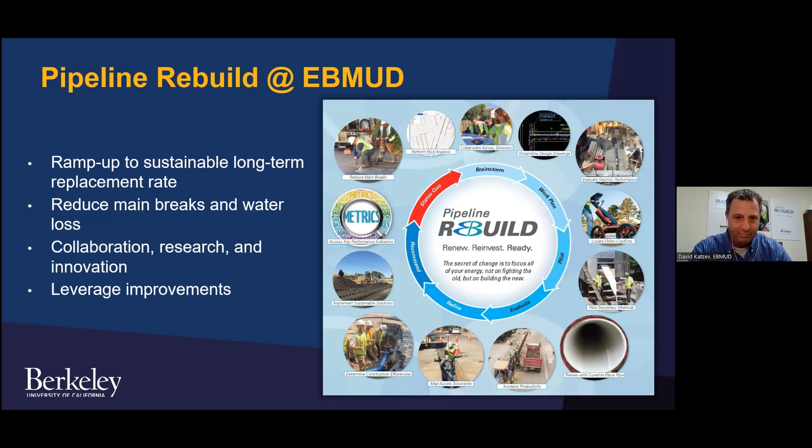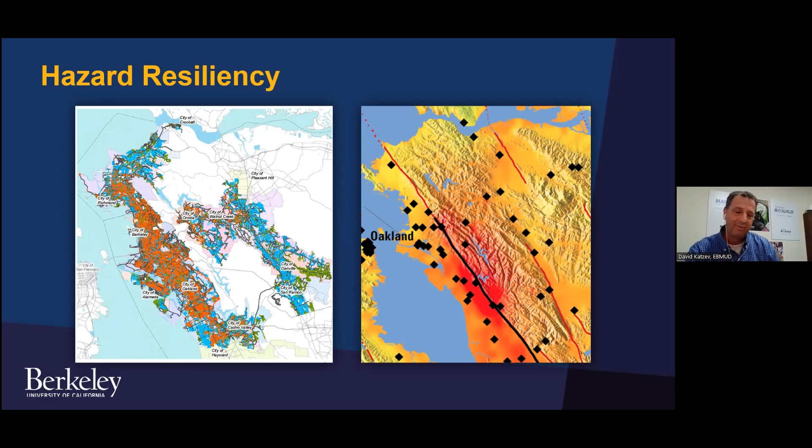In terms of what we need to put in the ground, we want it to last. Of course we want it to last a long time, but we want to make sure it's going to be resilient. So that's led us to universities.

But a few years ago an opportunity came up where the professor at Cornell retired. The professor, Tom O'Rourke, has a very good relationship with Kenichi Soga. We decided to move the whole testing apparatus over to UC Berkeley.

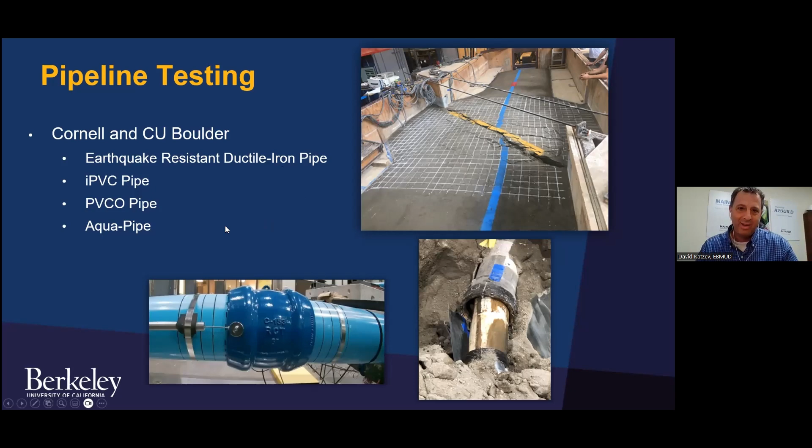And that's part of what started the whole Center for Smart Infrastructure. So now, instead of flying across the country to Cornell to see the tests - and by the way, CU Boulder has some testing too - I can just walk out the door, get in the car, and drive about 15 minutes up to the CSI, the Center for Smart Infrastructure, and see the test right then and there, along with my other colleagues here at EBMUD. So it's really convenient for us, but it makes sense - we're right here on the Hayward Fault, and we have these testing apparatuses right here in our service area. That's a little bit of background on how we've gotten to here.

And with that, I'll pass it back to Kenichi to talk a little bit more about what is the CSI. And like Kenichi said, we'll kind of go back and forth.

So the collaboration is really using a holistic approach to develop resilient systems through state-of-the-art lab work, which you sort of saw, and we'll give you more examples - smart sensors and robotics. How do we bring this new technology into the market? Looking at a lot of data - there'll be a lot of data coming from sensors, but we'll also already have lots of data. So how can we do that?

At the same time, how does pipeline-level instrumentation affect the whole system-level thinking of looking after our infrastructure? Obviously the challenge is aging infrastructure, climate change, water supply, natural resources, emergency and community preparedness. So even though we start with pipeline testing, we're growing our activities together to look at these challenges.

And the spirit is to provide innovative solutions to realize adaptive systems with the intelligence of life. Why is it adaptive? Because we tend to design our infrastructure for 100 years. David would like to prolong the life of the infrastructure to 150 or 200 years, because some systems are working well, but then he wants to know when to replace and when not to replace.

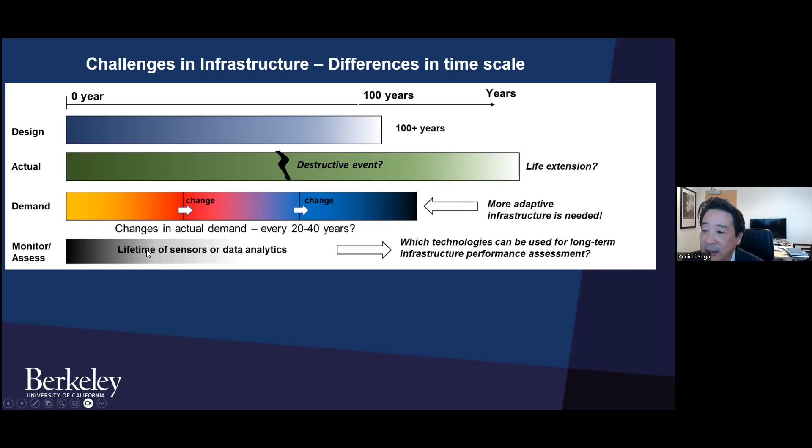Obviously we know the reason we say aging infrastructure is because demand changes every 20 to 40 years. It's not just that the pipeline is degrading, the way we use it is changing, and that creates issues for aging infrastructure. So rather than fixed design, can we make our infrastructure more adaptive to changes? And if you want to do adaptive change, you have to understand the real, actual performance, and that's where sensors come in. But then the question is what kind of sensors are good to monitor use for many, many years, for 20 years to come?

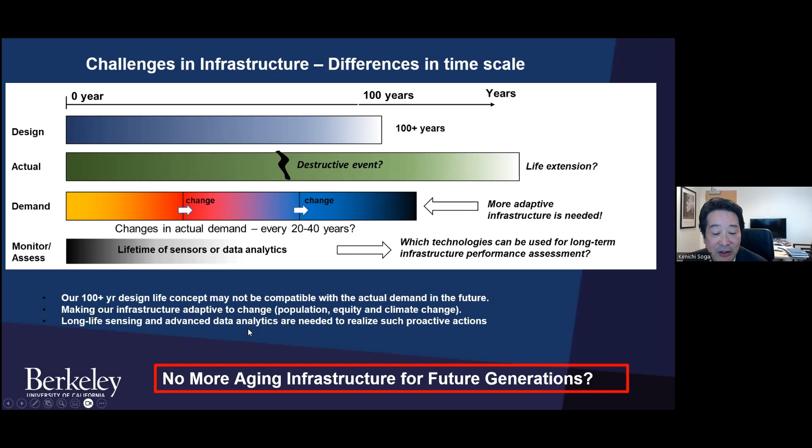We want to make our aging infrastructure not be aging infrastructure. It'll be great to say to our next generation, there'll be no more aging infrastructure.

This is something that David likes to talk about. Do you want to talk about this?

So there's a variety of areas where EBMUD has challenges, and we can link up with UC Berkeley to do research and come up with solutions that we can then implement. This shows the overall workflow and where we can all fit in with the different challenges that we have.

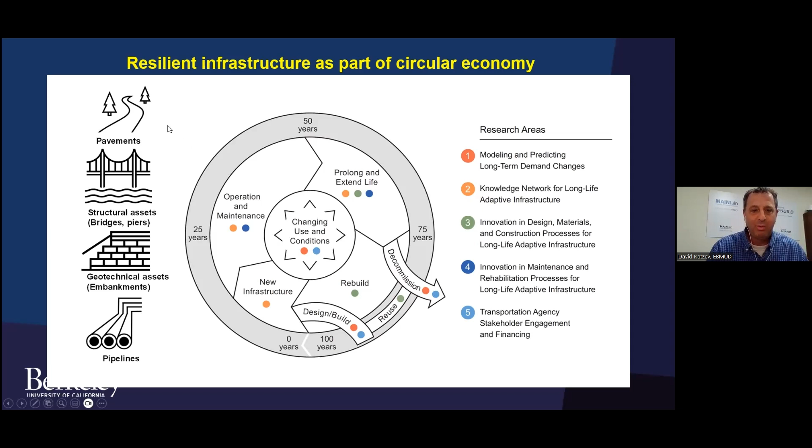Can we think of infrastructure as part of the circular economy? How we reuse the material and that sort of thing is something we're all thinking about right now.

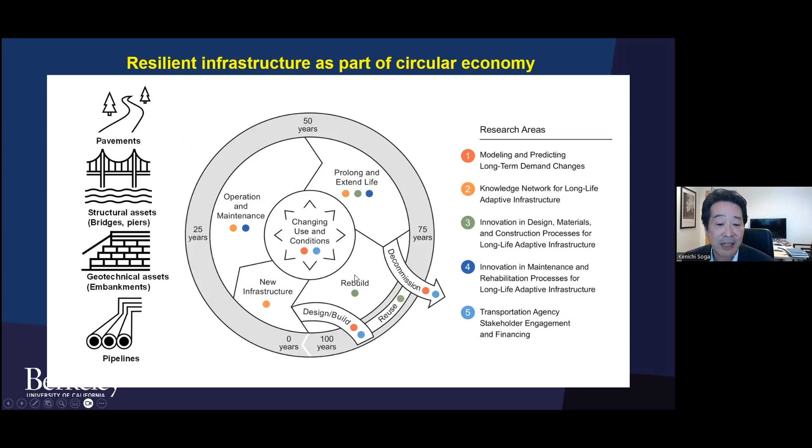UC Berkeley doesn't only have the Berkeley Center for Smart Infrastructure, we have other centers that link to infrastructure, like the Pacific Earthquake Engineering Research Center, information technology to be used for the interest of society, and the Berkeley Water Center. Some of you may know my colleague David Sedlak, who runs this, and ITS at Berkeley, the Institute of Transportation Studies.

So we're talking about pavement repaving after the trenching is done. The SIM Center is a National Science Foundation Center looking at big scale simulation, which I'll show you later. And Berkeley GMS, Global Metropolitan Study, is our colleagues from social science looking at infrastructure.

So we're working together to create resilient infrastructure for sustainability and equity. RISE is one of the three initiatives within the College of Engineering to make engineering for society.

In order to do that, we just don't do research. We want to make innovation and create a market. So working together with you, infrastructure owners, as well as consultants, contractors, information technology - it's really about finding innovation and showcasing it works. But then we need to create a market, a smart infrastructure market, a community-based resilient market.

And how do we invest ourselves? The data that you have is a currency that we can use, and how do you bring that particular data set as part of you using that, and bring it back to your own company and invest in your infrastructure?

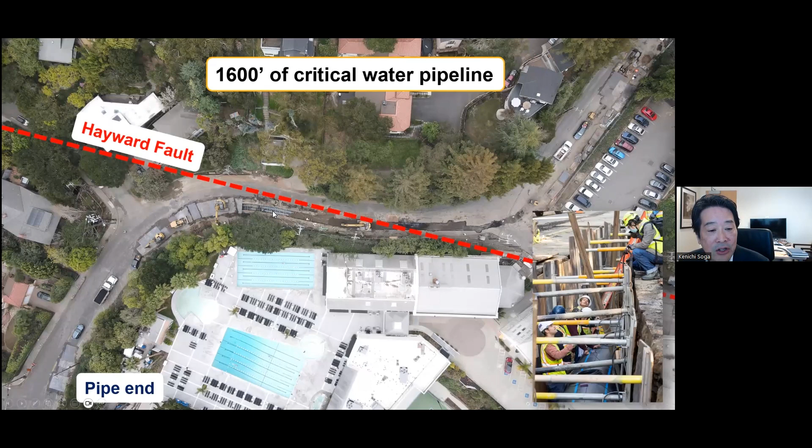This is one of the examples using some sensors. This is a pipeline rebuild David has been talking about, which is crossing the Hayward fault. So when they were doing the rebuild, we actually put in a fiber optic sensor. This is a distributed fiber optic sensor, which is a standard optical fiber used for communication.

But when you shoot a light, every point a light comes back, and we understand a particular light coming from one particular location and analyze that, we can say what is the temperature here, what is the strain here, and what is the vibration here. And by doing that, for every light coming at different locations, we get what we call distributed temperature, distributed strain, or distributed acoustic or vibration sensing.

So if you put this in a pipeline, if a certain place strains, we can see what magnitude of strain that is and where it's happening. If you're having a leakage, and then you can hear the sound, it can tell you what the sound is and where it's coming from.

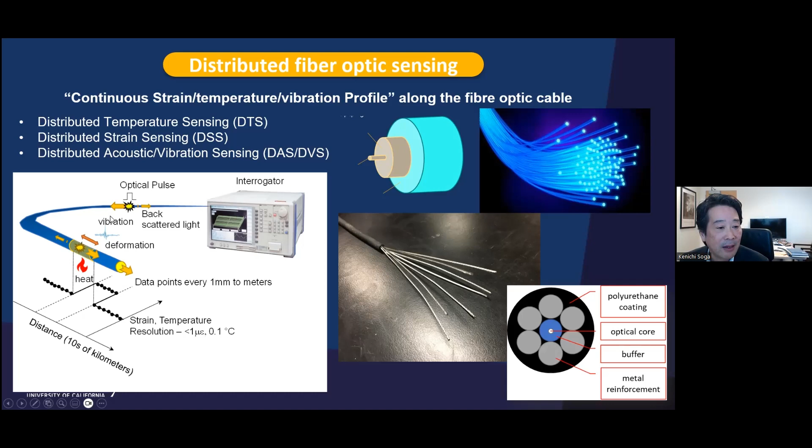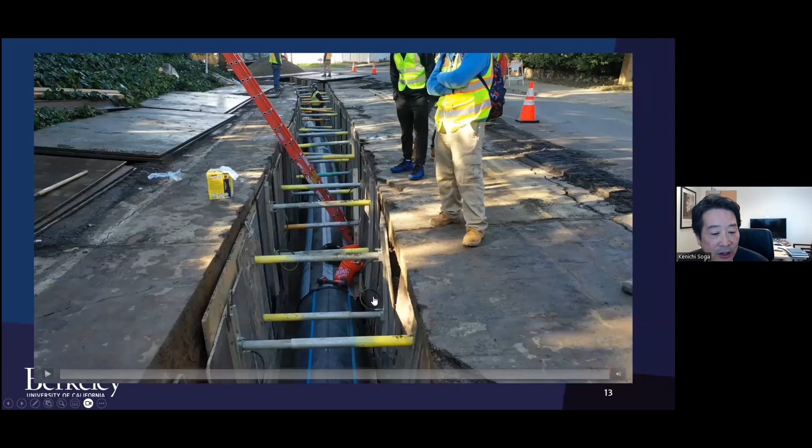So for example, this is the pipeline where we put the fiber optics. You can see a line of fiber optics attached at 3 different locations. I'll show you a video where we attach the fiber optics at these locations. And if the pipe bends from the fault movement, we will see a difference in strain at different locations, which allows us to understand how much this particular pipe is bending.

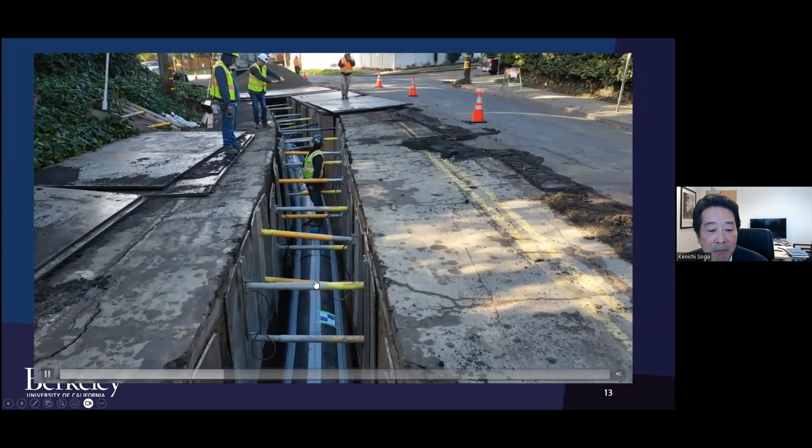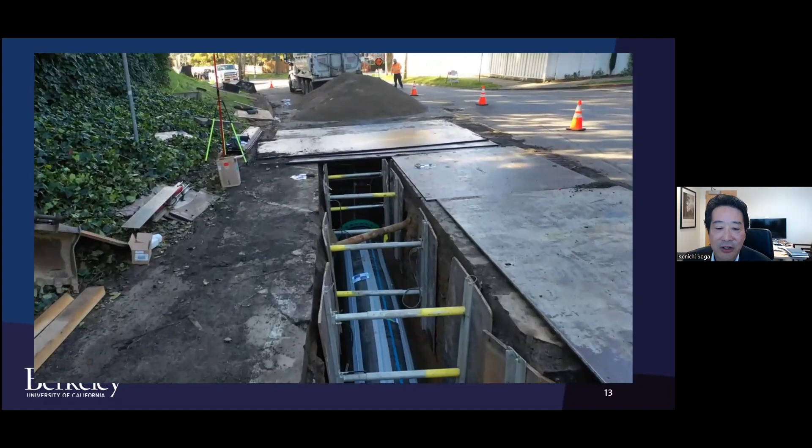So once you bury a pipe, you're not going to see it for 100 years. So the spirit is, can we put the intelligence on this pipeline so that we can monitor it for the next 100 years, and therefore our next generation will be thankful for us doing this.

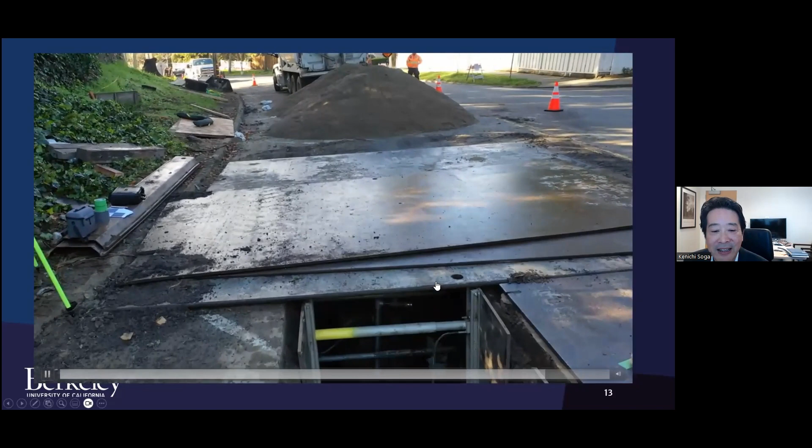So this is a trial to show the value of sensing, so that infrastructure owners like David will say, oh, this is useful. And then he can start to ask the pipeline companies to embed the fiber in their products.

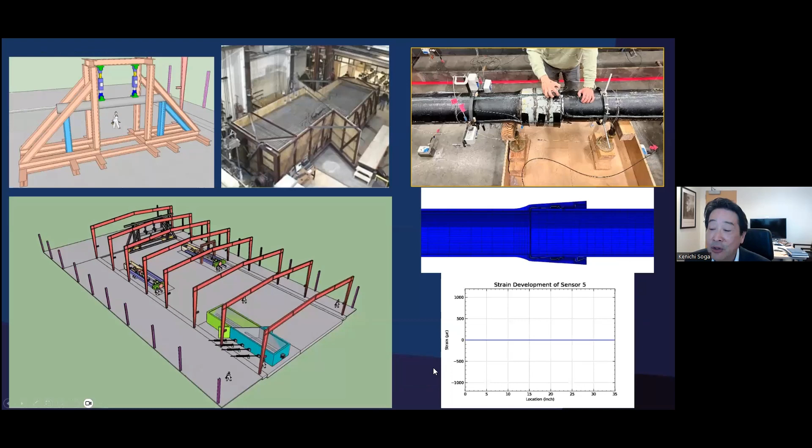And once we bury our pipeline, we're not going to see it for the next 100 years. Why not embed intelligence during construction for future generations? Obviously, in order to create confidence, we have to show the value of sensing.

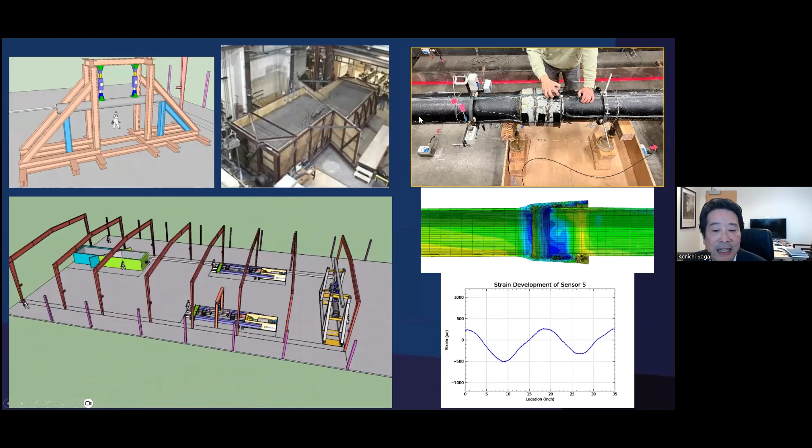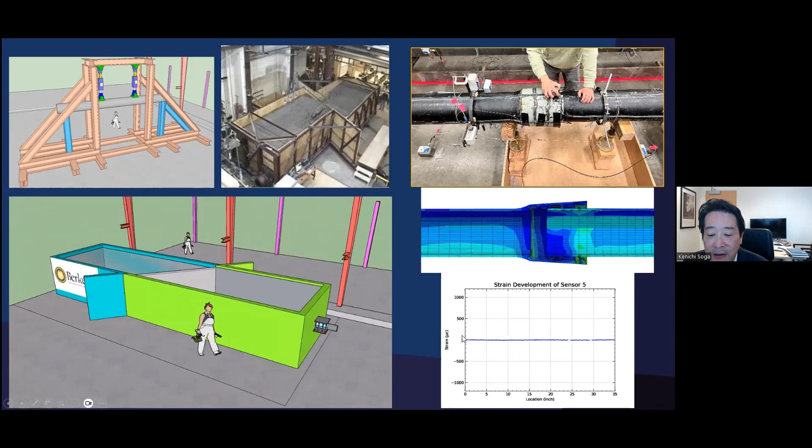So these are the facilities we built in collaboration with EBMUD at UC Berkeley to try different testing of pipeline, at the same time putting fiber optics that we try to use in the field, showcasing the value of sensing and monitoring the joints, for example. You can see cables attached around fiber optics, which measure strain or temperature all along the fiber. And by doing that, we can get a continuous profile of strain around the pipe, for example, around the bell.

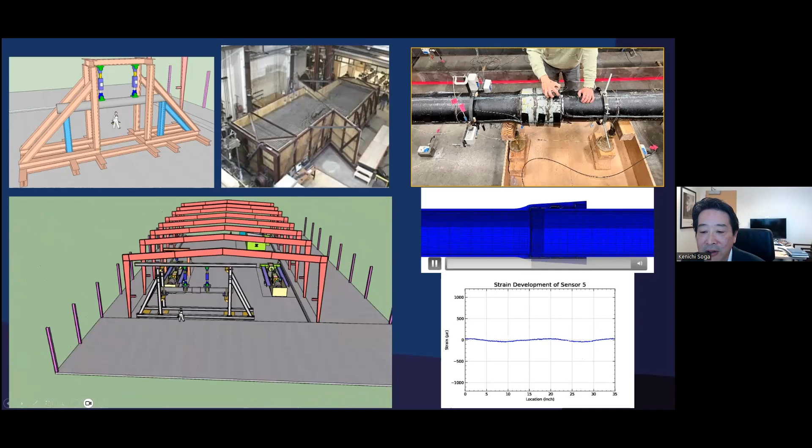And that's what we see, a sinusoidal wave. The reason why is that as you pull, this particular bell is squatting. And if it squats, you see two sides in tension and the other 90 degrees in compression. That's why you see tension, compression, showing the mechanism of how this particular pipe is moving and reaching failure.

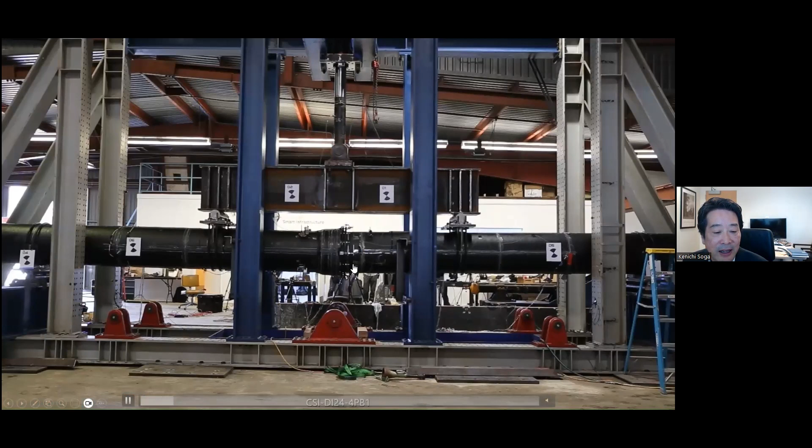So we're doing a lot of testing on that. This is one of the tests we recently did with Kubota pipe, which is the 24-inch pipe, and it's a bending of the joint. You can see the size of it. The pipe will elastically move up to 7 degrees, so the company says up to 7 degrees we're confident that it will work okay.

So we wanted to see how far it can go. The pipe is pressurized, filled with water with pressure, and then we do a bending to make this particular bend as much as possible until the pipe fails. So we're going 7 degrees, past 7 degrees, going to 10 degrees, and it keeps on going. There's no leakage, even though it's beyond the threshold that the company says it can go.

And it keeps on going until 20 degrees. Then when it goes to 22 degrees, we start to see a crack, and then suddenly the water starts to come out. So a little bit later, you're going to see something happening soon. Now it's reaching 22 degrees, and then it failed, and you can see the water flooding.

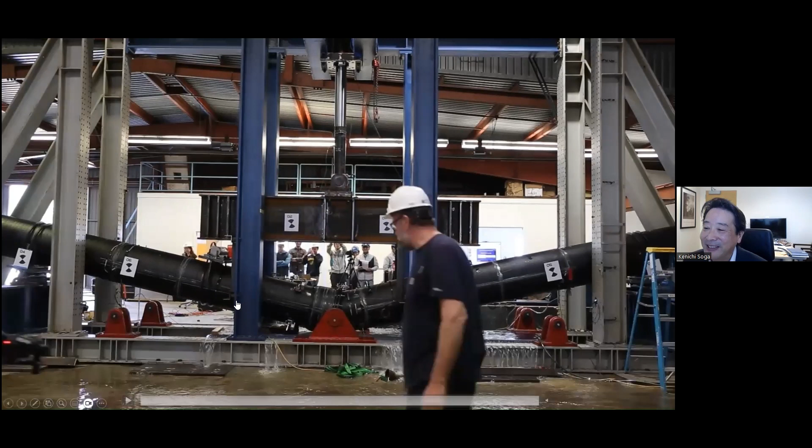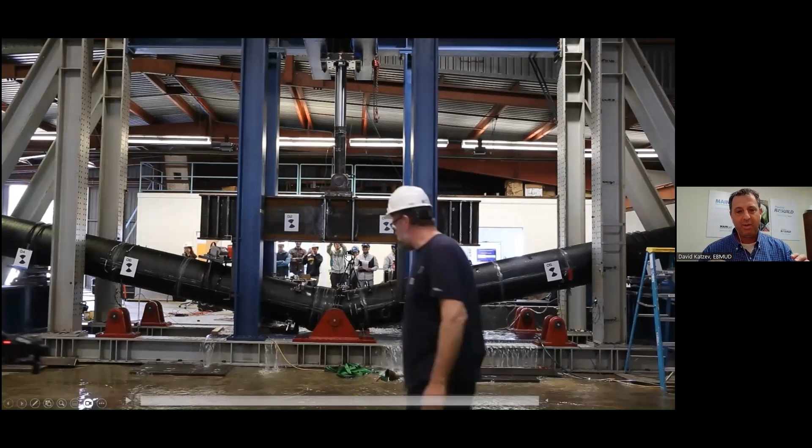David, do you want to say something on this one? I just think that this is earthquake resistant ductile iron pipe, and that's one joint. When we install pipe, we do many joints together, and this joint can move back and forth inside the joint.

So the bending test is one test that we can prove and verify that the pipe is resilient, but we also do tension tests and compression tests and other tests just to classify the pipe in all the different tests. And we're going to install the Kubota ERDIP on a project coming up really soon, so this test is quite helpful for us.

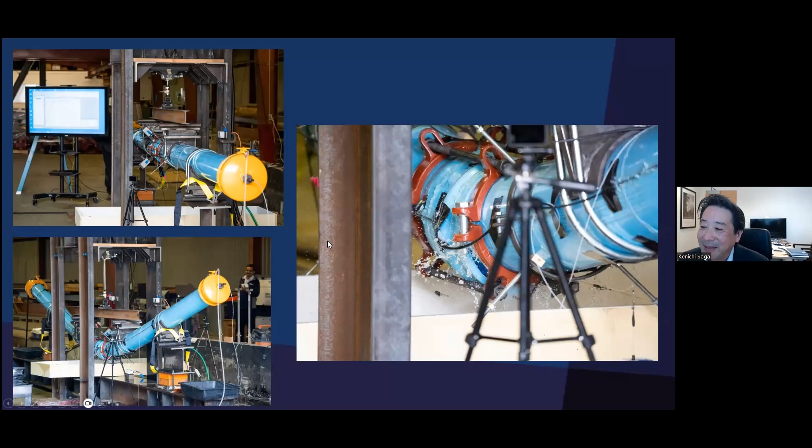David, do you want to talk about this pipe? Plastic pipe? We also look at plastic pipe, so we look at a variety of materials.

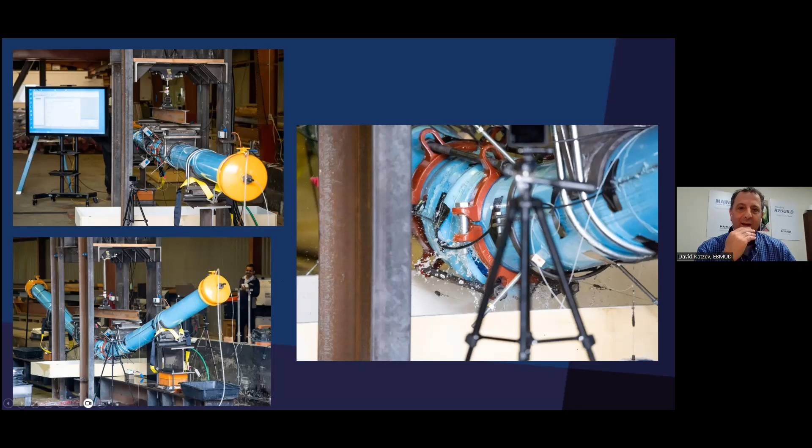So this is a plastic pipe, and it has an external harness or restraint, we call it, which is the red piece you see there. This is just another example of us bending the pipe to see how far we can take it until failure. We try to fail the pipe, take it as far as we can with each and every one of the tests, just to see how strong these materials are. We repeat the test several times, so we have some repeatability. And then we look at the FE analysis, the numerical model, to see where the stresses happen.

This is another one. Kenichi, you want to do this one? Or? Oh, you can go. Yeah, this is also earthquake resistant ductile iron pipe. I think there's a video here that can start. Yes, this is an interesting test, one of the other things we're trying with the Center for Smart Infrastructure. Manufacturers do tests, other people do tests, but we're trying to be unique.

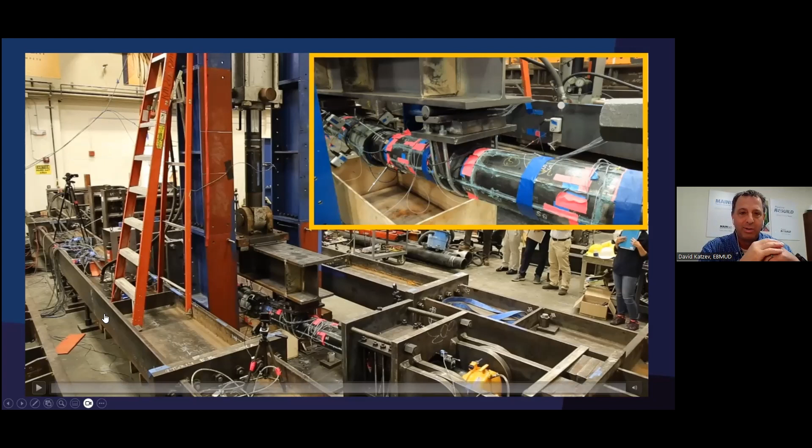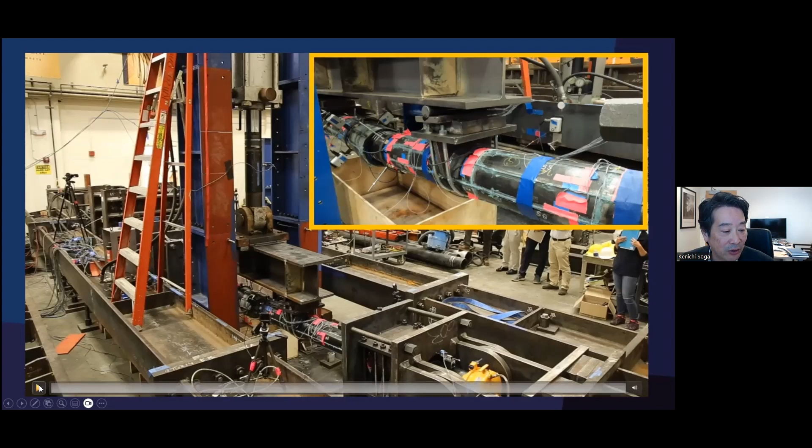And this is a very unique test that we did, where we've actually bent the pipe down, about 7 or 8 degrees, and then pulled it in tension. So we had two different loadings, a bending and tension, to see how it responds and when it fails. We call this the biaxial test. So this being bent for 8 degrees, and now we're pulling the pipe in tension. I'll show you a video with background noise, where you'll hear something.

So we're pulling the pipe, and at some point the joint breaks, but then you see a little bit of water, almost no water coming out. We keep pulling the pipe, and you can see the joint here. Then you start to see a little bit of water coming out, but it's still keeping the water pressure. We keep pulling until it starts to have a large leak.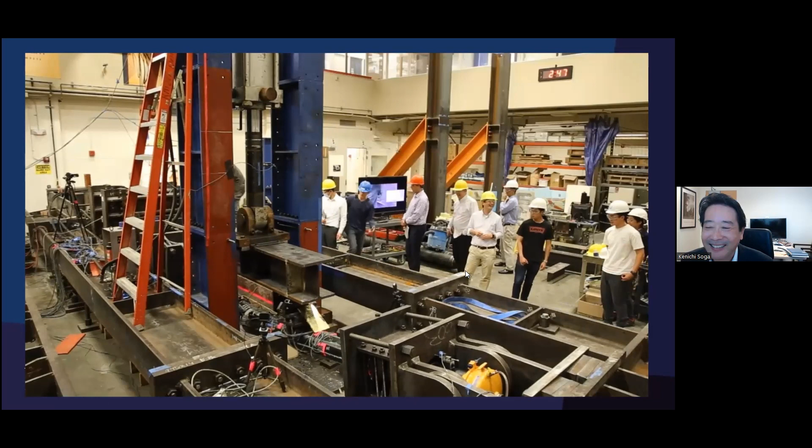So these are the tests we do, trying to understand the actual performance of these pipes, also measuring strain details, because we do finite element analysis to understand the failure mechanism and what will be the weakest point. Would it break at the same place? Because if it's the same place, we know it's robust, that it will break at that particular point. We don't want to see a random break.

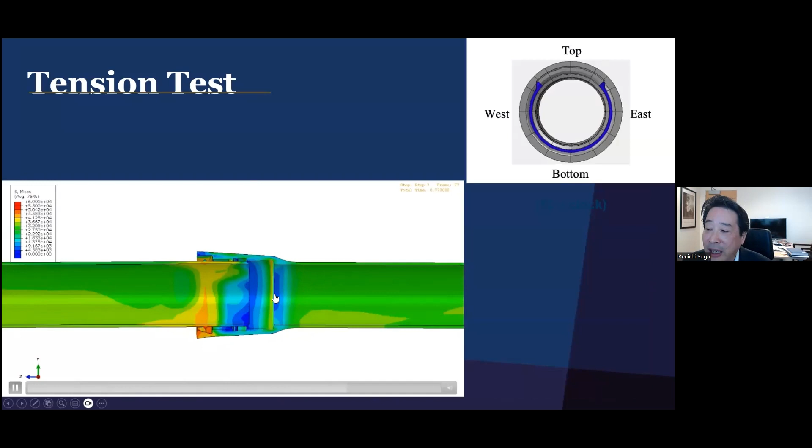So these are the tension tests, and then we do simulation, but the fiber optic sensors allow us to calibrate the data so that we understand the real performance of the joints. So this is for the tension test.

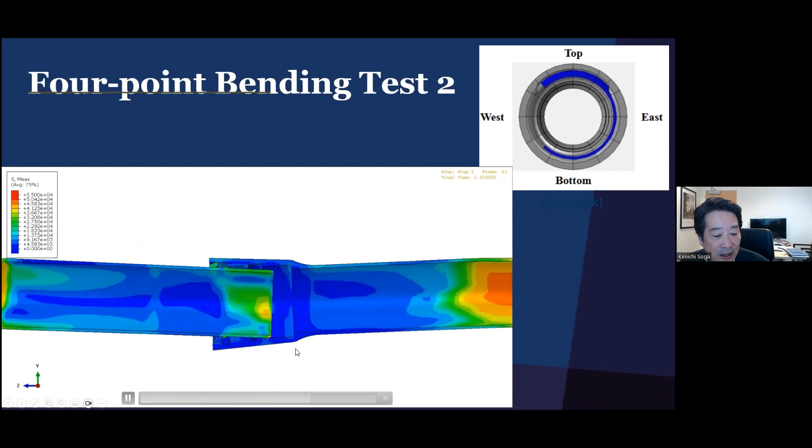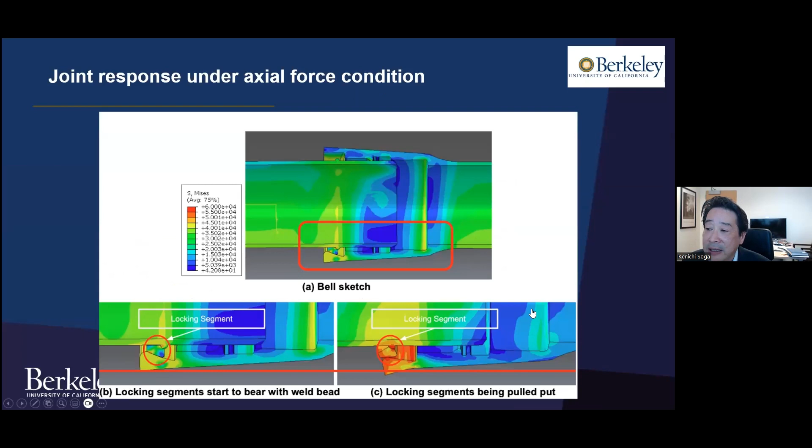Here's another one for the 4-point bending, where we start to bend, using our finite element analysis. Again, we do simulation to see which part of the pipe, as it bends, starts to stress a lot. You can see the color of the stress showing where the stress concentration is, and then as you pull, what's going to happen to these pipes. That allows us to understand the failure mechanism or sealing mechanism, and see how these pipes are performing, and how we can improve if necessary.

So you can see all these finite element simulations. At the same time, we want to move it to the field, because every pipe is different, every ground condition is different. So we want to make sure we can monitor our pipeline in the field, and that's where monitoring technology and robotics technologies will be useful.

So using, for example, satellite or LiDAR to look at landslides, or using some robotic technologies. This is the Boston Dynamics dog robot. Where can we use these robots to scan the trench while you're replacing your pipeline?

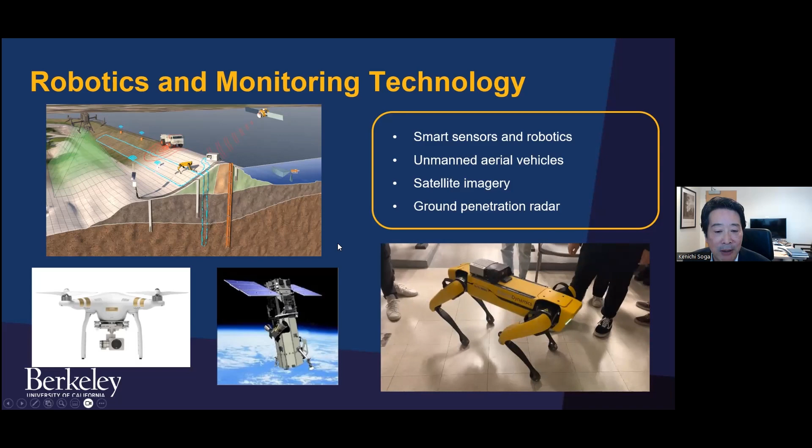Fiber optics you can embed on the asphalt pavement, so you can put the fiber optics like this, and then you repave it. Actually, if you have a dog running, you can see the dog running. Or if you run, you can see how people are using that particular road.

So this is a bit like a touch screen of this particular road, and you can see how the cars are moving on the street. And then we can see the color, which is the magnitude of the strain as the car is moving, trying to understand who is moving, what kind of safety we can provide to the pedestrian, for example, using this kind of technology.

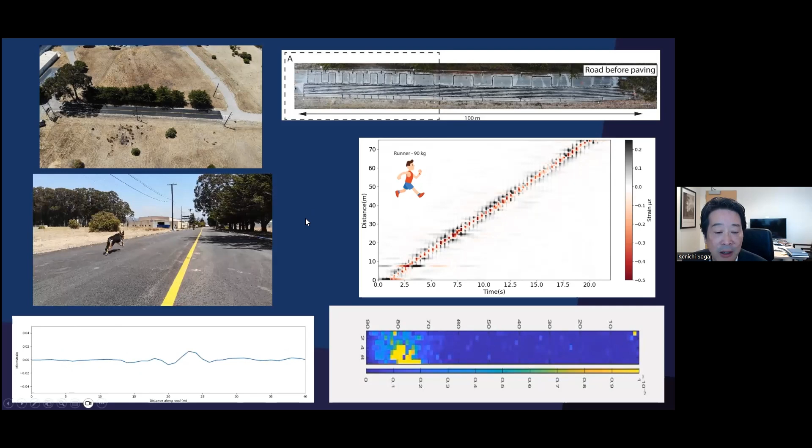You can see that we can use this kind of sensing technology for different cases like tunnels. This is a project with the Singapore government where they're putting this fiber optic sensing for a 51-kilometer long sewage tunnel. The point is to use this sensor for the next 100 years, because in Singapore they're going to do a lot of nearby underground construction. For the sewage owner, it's very important to protect their sewer when the new construction is done nearby.

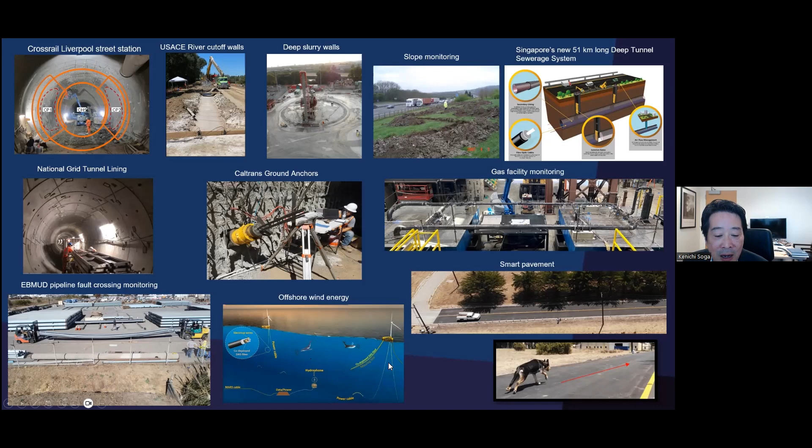We also have a project with a floating wind turbine, which is what's going to happen in California, where you have these mooring lines, and the mooring lines will have fiber optics which we can use to hear the noise. The idea is, can we detect when whales or dolphins sing, so that we understand the environment around the floating wind turbine.

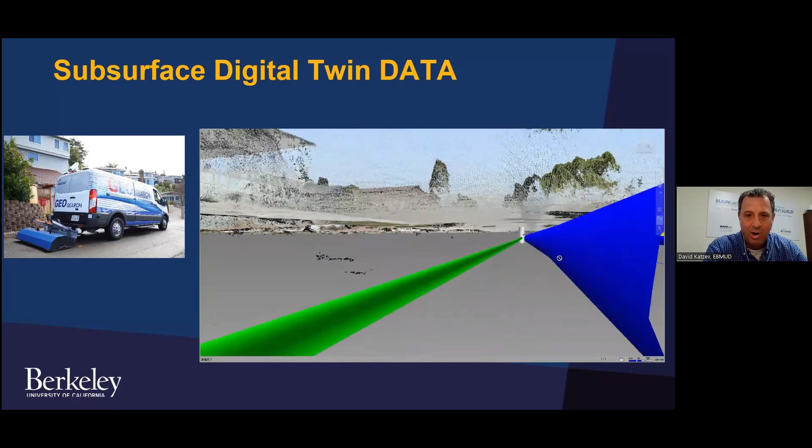This can help us in the design process to know exactly where we want to put our new pipe. Or it can also help us during construction. When our heavy equipment operators are out there digging a trench in the ground, if they can visualize this with their iPad, walk up and down the street, see things in 3D, then they'll know what's coming up.

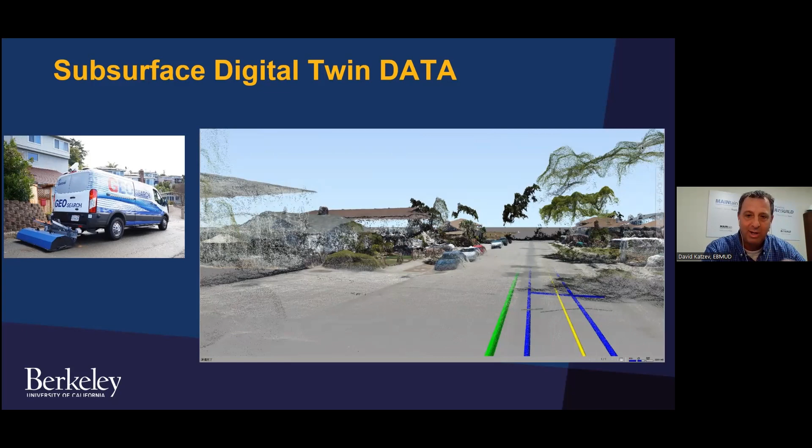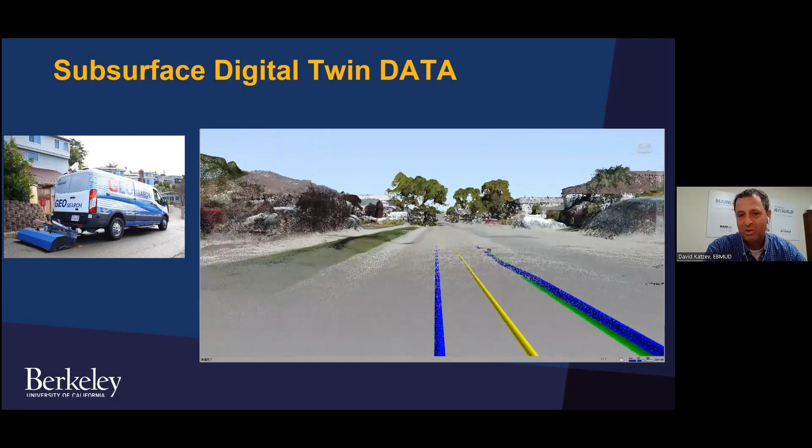Hopefully you want to do things safely, but maybe this can increase our productivity as well. So this is a technology that we're testing both in design and construction. The blue is the water pipe, the green is the sewer, and the yellow is the gas. This is just one example where we've applied this technology.

Once we understand the performance or monitor our infrastructure at pipeline level or road level, what we can do is simulate each road, but then at the regional scale, like the whole entire Bay Area in one model. For example, this is a road network, and there are about 7 million people living in the Bay Area, with about 50 million trips every day. So we model each individual trip going around the Bay Area within a day. Then let's say if the Bay Bridge stops due to an earthquake, what's going to happen to the traffic?

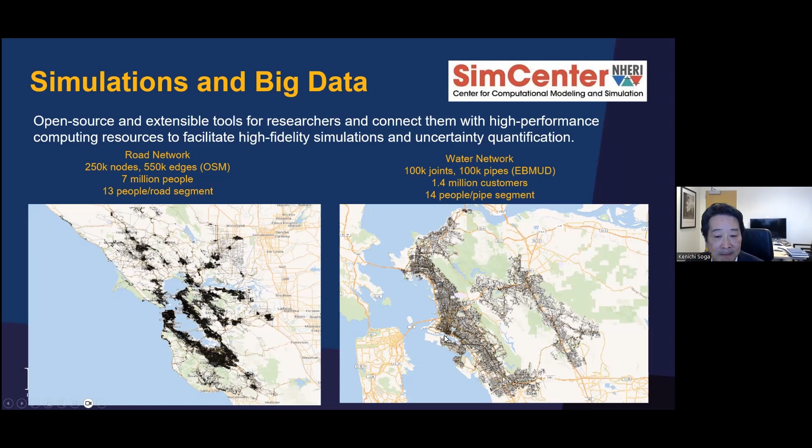Similarly, when you have a water network, this is the East Bay Mud network. Let's say if you have an earthquake and pipeline damage, what's going to happen to the water supply? This is one of the examples we do within the SimCenter, where we simulate an earthquake scenario. In this case, it's a Hayward Fault, 7.4 magnitude earthquake.

When that happens, we know the ground shaking at different locations. We predict how much it will shake locally within that earthquake, then assess each pipeline for its probability of failure. After that, we determine which pipelines have broken, and what happens to the water network. We do the hydraulic model to understand which customers will get water or how much they will not get.

At the same time, you can see an average water shortage, but we don't know where the earthquake epicenter is going to be. So we do Monte Carlo simulation to see what is the average, but also the standard deviation and the uncertainty. At the same time, my colleagues at Sim Center do simulations of each red tag building - each building, is it going to be red tag or not, looking at each house's condition.

By doing that, you can look at the interdependency. When you look at the recovery, if there's a lot of red tag buildings, perhaps there's no need to recover the water supply in that area because people won't be living at that location. So with East Bay Mud and others, we're trying to discuss how these different simulations can look at interdependency, and how we look at recovery plans for our infrastructure to reach functional level when a major earthquake happens. At the same time, what can we do right now so that functional recovery will become faster if a big earthquake happens?

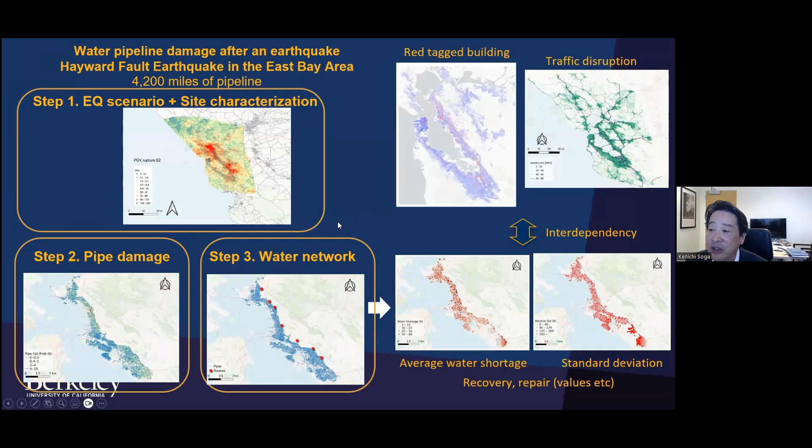We also have individual projects. We're working with East Bay Mud over the next 1 or 2 years, and we're looking for you to join these projects and work together. That's why East Bay Mud is sponsoring the course, hoping that you can join together on these projects. David, do you want to talk about some of these?

So these are some of the challenges that East Bay Mud has identified for research opportunities. What we do is link our own subject matter experts in the different divisions and departments at East Bay Mud with Kenichi Soga, and he will find other professors at UC Berkeley or other programs there to create the team to do the research - whether it be on dams, wildfires, landslide modeling, pipelines, or the other items you see listed there.

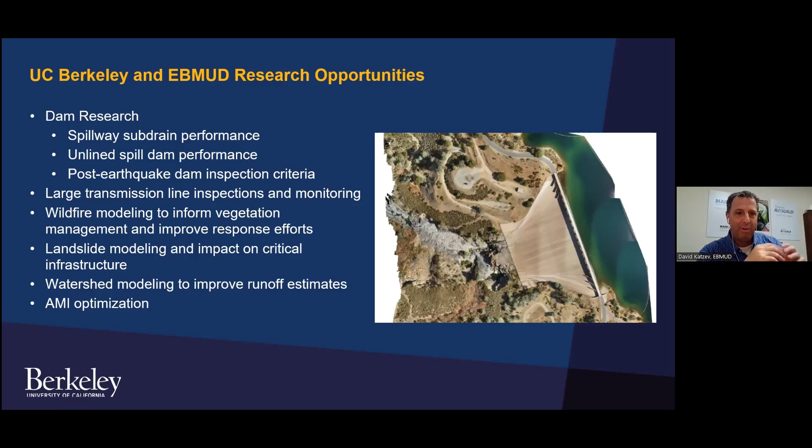So then we create these research teams, and we also bring in other utilities - SFPUC, LADWP, and MWD right now - but there could be others outside of California that can get involved. I think the more utility owners we get, the better, in terms of creating this team and this research. So this is where we started, but we know there are other areas to explore as well.

So we just finished our Phase 1. East Bay Mud provided 1.5 million investment to do this Phase 1, to really build up that large-scale pipeline testing facility. As you see, Cornell has been doing some testing, but we want to go to bigger, larger diameter pipes because we see these pipes used in real applications.

And then we've been doing workshops and working together with East Bay Mud to really build up the basics so that we can go to Phase 2.

So we're starting to look at the opportunities for Phase 2. SFPUC and LADWP have committed some of the funding for further developing Phase 2. We're talking with MWD, and we'd like to start building up the community to go to Phase 2, expanding the pipeline testing facility.

We want to look at like a 104-inch diameter pipeline bending, which MWD uses. We want to look into the opportunity to expand our testing facility, but at the same time look at developing a midterm and long-term business plan, working together with you.

And how do you make Berkeley a hub with the other centers that you have seen? Obviously, we cannot just keep on getting funding, we have to deliver. Phase 3 will be a self-supporting innovation center with data analytics and that sort of thing, and we'll start to develop business models together with the water agencies.

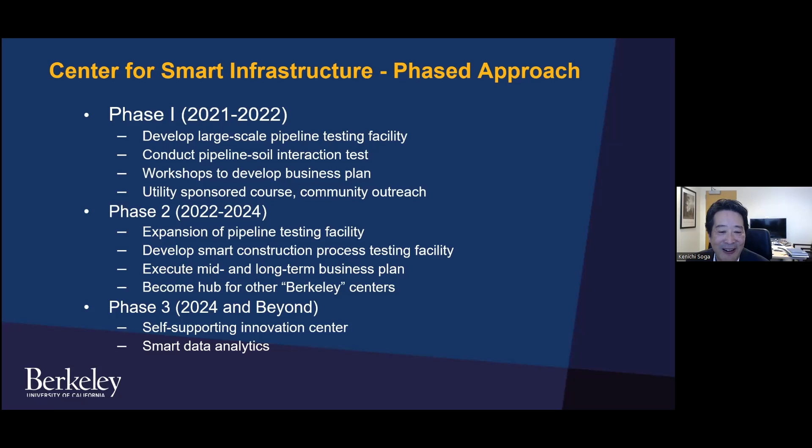So to wrap up, what we wanted to discuss today was to showcase our initiative in terms of doing large-scale testing facility work, leading to smarter construction and maintenance savings in the rehabilitation of our aging infrastructure, and energy management using monitoring and robotics technologies, big data, and AI for cyber threats. The goal is about sustainability and community resilience.

However, we really need to bring the next generation to be excited about infrastructure engineering and the field we're working on. So you can see that we have developed an East Bay Mud sponsored course. Maybe David, do you want to talk about that?

Yeah, we developed a class. We taught an undergraduate class last fall, Civil Engineering 112, focused on water and wastewater operations and design. We had 25 students, with different East Bay Mud experts coming in to teach. We had laboratories where we went out and saw facilities, and then we had students do research projects. It was the first time we did it.

We're going to do it again. You know, what Kenichi said, getting students excited about the water industry and research.

I just had a student reach out to me. She's in her 4th year at UC Berkeley. She's going to be taking a data class next year, and she reached out to me because she wants to do a semester-long project with East Bay Mud on some data, looking at pressure in our water distribution system and forecasting main breaks. So we got the students excited. She wants to do the research, and now I'm going to link her up with some of my engineers to work on the project next year.

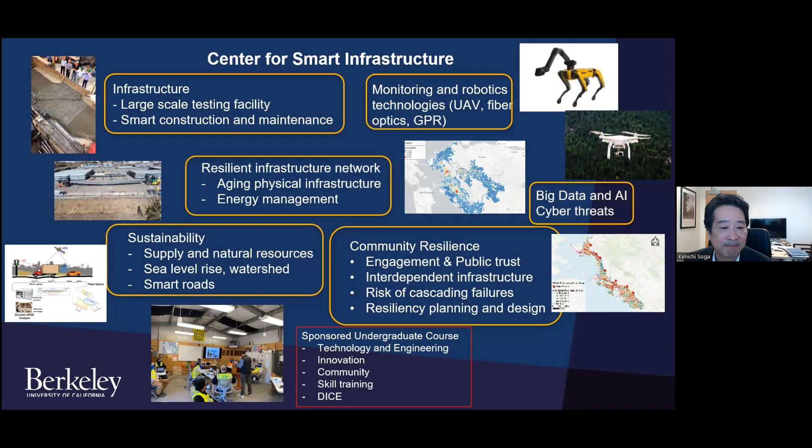So this particular CSI is not only a think tank, it's more importantly a do tank. Let's do it and then measure it and then improve our infrastructure. Thank you very much for listening.